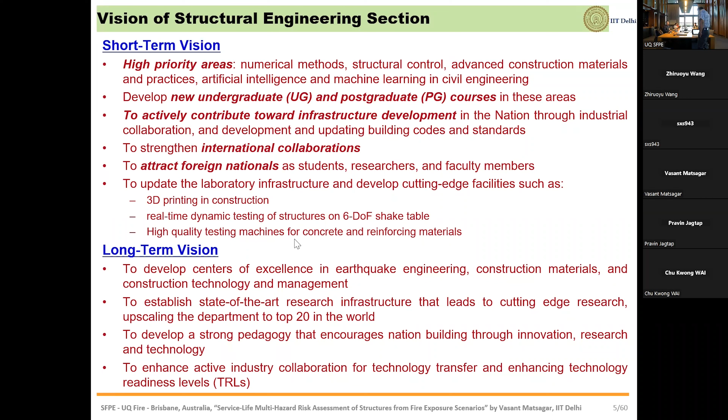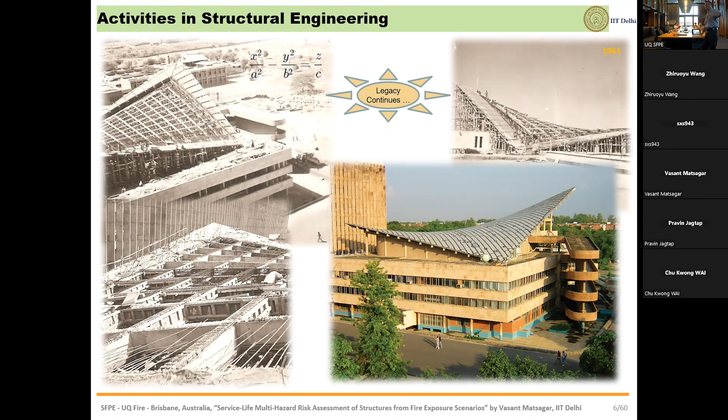Our institute was established in 1961, and structural engineers have contributed to the development of the institute. What you see here is our convocation hall where degrees are awarded every year, made of reinforced concrete, a hyperbolic paraboloid shell structure. Since then, we have been contributing to the development of the institute.

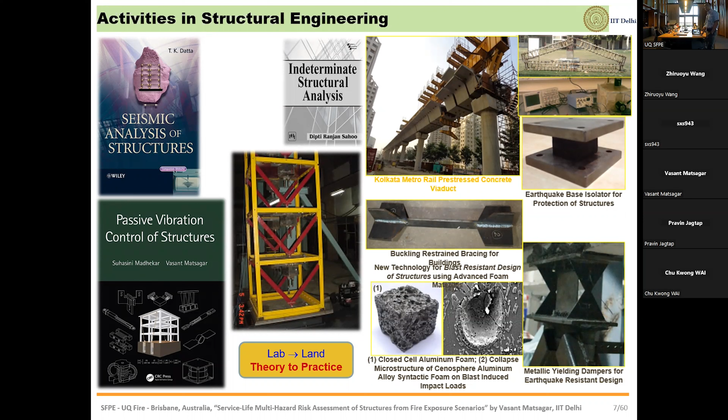Recently, there are investigations being carried out in different areas in structural engineering, with some books published as well as some patents filed. We are also transferring our knowledge from the laboratory to field practice. On this slide are some contributions we have made to national development, including flyovers, bridges, blast resistant structures, and similar contributions to infrastructure development of the country.

With that little background of the institute I am coming from, I would now move on to the topic of today's presentation, which UQ SFPE, the Society for Fire Protection Engineers student chapter, has hosted. I'm very grateful to them. Also, I'm grateful to University of Queensland faculty member Professor David Lange for hosting me during this visit to UQ. Today my talk will be on service life multi-hazard risk assessment of structures from fire exposure scenarios.

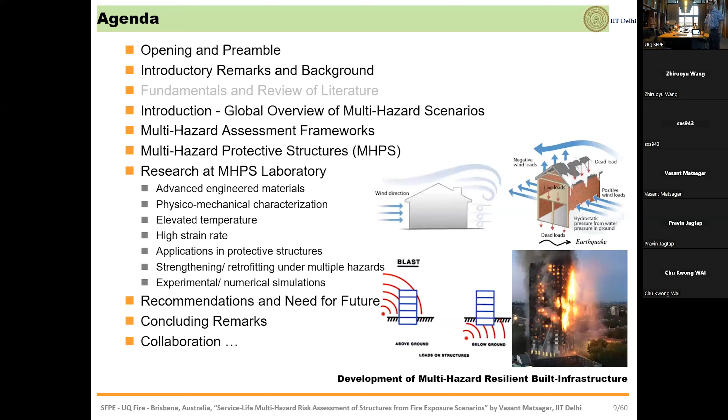The overall outline of this topic: I will talk about background details of the current infrastructure development happening across the world, and where it should be going to ensure it is sustainable and climate friendly. I will not review the literature, but will showcase the current development in multi-hazard resilience of infrastructure, laboratory facilities developed at IIT Delhi, current research works, and future works. I will present the current status of development of multi-hazard resilient built infrastructure in the Indian context in particular.

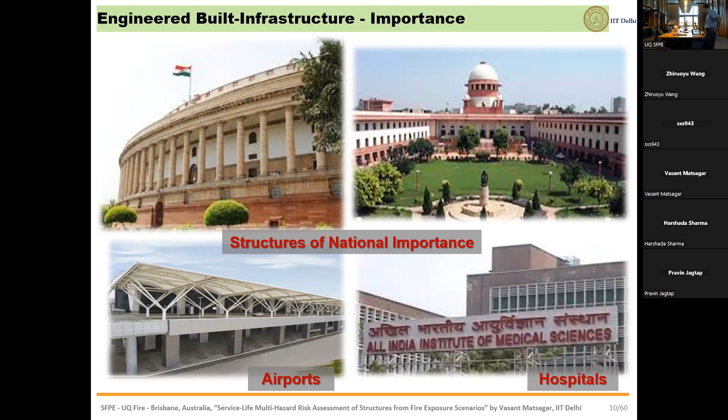Mankind requires different kinds of structures, be it nationally important structures, airports for transportation, hospital buildings for healthcare, as well as power generation, nuclear power plants and wind turbine towers. For hydroelectric power generation we need dams, and there are a large number of engineered structures or built infrastructure that we have to develop. We cannot live without them; that is one of our basic needs.

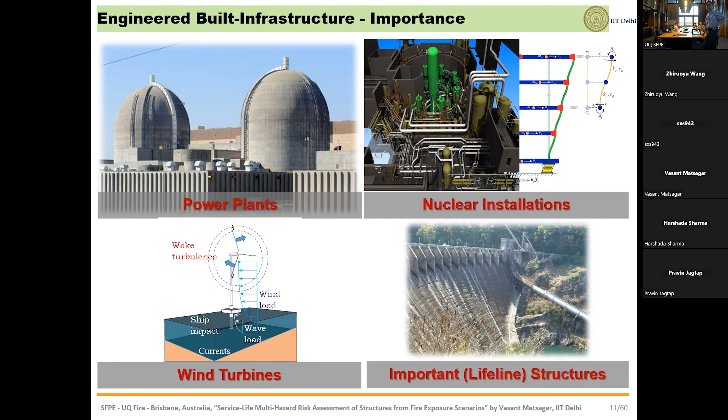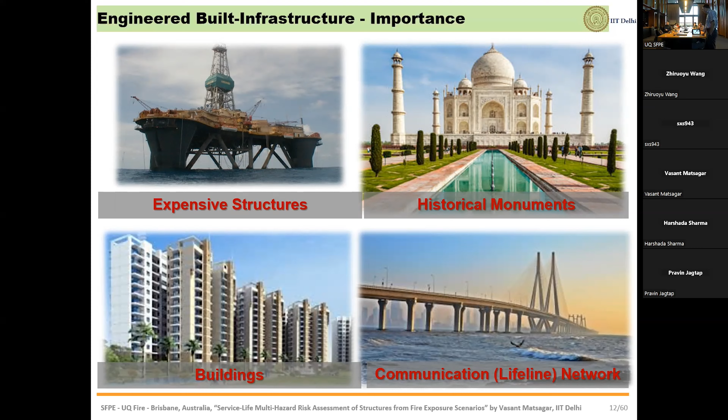If we look at what kind of structures we have been building, these are the conventional practices. We started from stone masonry structures, then brick masonry, and gradually moved towards reinforced concrete structures, and these days steel and other composite structures. Then we have to worry about how they are performing when put to use over a service life of about 100 years.

We see certain issues that most developing and developed countries are facing, in terms of both environmental impact as well as performance and aging. Old infrastructure has already aged before attaining its total design life. Typically for buildings and bridges, a design life of 100 years is considered, but much before that they have started seeing much deterioration, to the extent that some are not even in a position to be rehabilitated, retrofitted, or strengthened to remain usable. So there is no other option than demolishing them and building new ones, and that contributes significantly to carbon footprint.

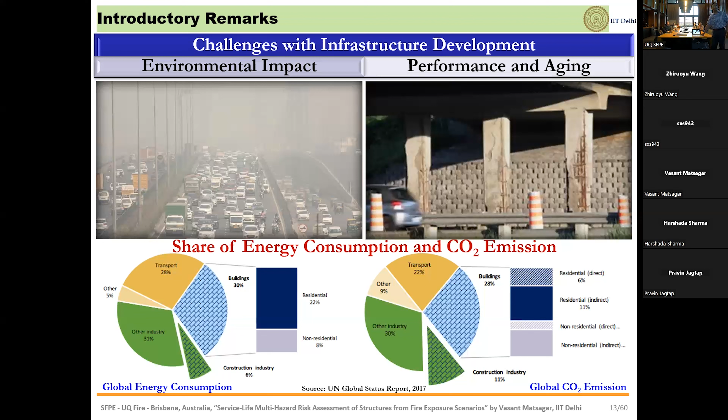There is already significant carbon footprint from the construction industry and building sector. I will keep aside the transportation sector. You can see almost 40% of carbon footprint comes from buildings and construction industry, as high as that. If you see energy consumption also, buildings and construction industry contribute significantly towards global energy consumption. This is something we really need to worry about, how we can bring this down by developing new materials and using them in infrastructure development.

If you see a global picture of building sector energy carbon intensities, it is again a worrisome picture. Focusing on these two countries, India and Australia, unfortunately there is a heavy carbon footprint in terms of terajoules, more than 150 tons, and there is a long way to go for us to develop new building materials and ensure they are durable as well as resilient to whatever loads they will experience during their service life. At the same time, we need to reduce carbon intensive materials in structural development and find alternatives which are more climate friendly and environmental friendly.

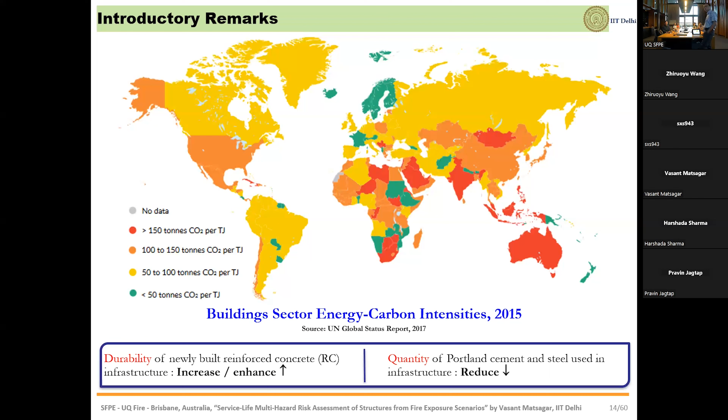Some of these issues we have started addressing at IIT Delhi. We are working towards developing new materials that are more sustainable, more nature friendly or environment friendly. There are some local issues also that we face in the national capital of India, Delhi.

Surrounding our region there are farmlands, and during the harvest, immediately after the harvesting season, for preparing the fields, the agro residues are burned - this is called stubble burning. The agro stubbles significantly contribute towards air pollution in the national capital as well as the surrounding area, going almost to hazardous levels, and we need to find a solution to that.

Incidentally at Delhi, in our laboratory, some of our students are working on converting these agro residues into useful civil construction engineering products, such as biocomposites. Currently there is one startup initiated by one of the students on converting these agro residues into biocomposites on the field itself, so that even the transportation costs are reduced.

Our overall aim is to achieve some kind of circular economy, wherein we make sure that the entire agro residue or agriculture waste is useful either in the construction industry or otherwise, while also making sure it doesn't contribute to air pollution and health issues caused because of that.

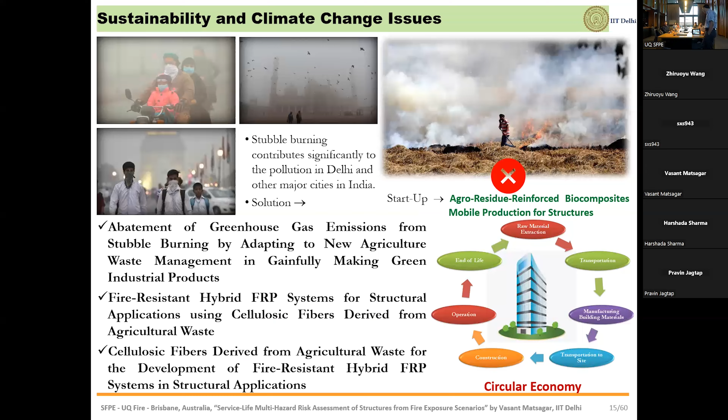With this background on how new construction materials are required to be developed and used, obviously the next question comes when we build some structure out of it, how that structure would perform, because we have good experience of reinforced concrete, we have good experience of steel, but for us, biocomposites, particularly obtained from agro residues, are an absolutely new material.

The subsequent objective was to see how it performs under exposure to fire, so there are two different categories of tests we had to conduct. But then the first question came as to what should be the loading protocol and support condition, or the load setup that we should have.

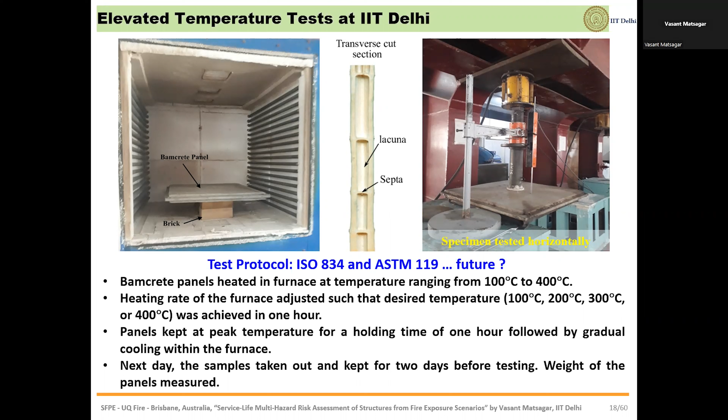Initially we applied the load sequentially, meaning it was first exposed to thermal load, then cooled down to room temperature with natural cooling, and then subjected to mechanical loading. Subsequently, we have also tested them with simultaneous application of thermal and mechanical load.

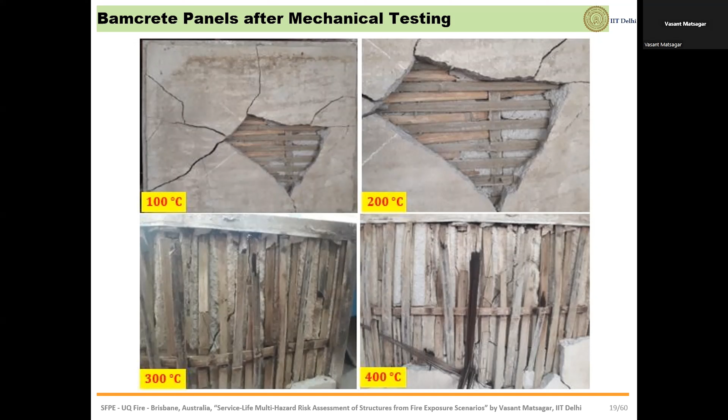As you can see, with different temperatures there is significant degradation seen, particularly in the bamboo reinforcement, and at about 400 degrees Celsius it almost loses its capacity. You can see there is falling, there is debonding between the bamboo culms and the mortar or fine concrete that we have used. With increasing temperature, there is significant reduction in the capacity of the bamcrete panel.

We have coined this word bamcrete, for bamboo plus concrete panel, and now we are applying this thermomechanical loading simultaneously. As you can see, this is about a 1 meter cube fire furnace in which we can raise the temperature up to about 1300 degrees Celsius.

Nevertheless, for this kind of natural fiber specimen, hardly up to 500 to 600 degrees Celsius is sufficient. You can see from the top, we insert a loading actuator arm, and we have the option of providing it at whatever location we would like to.

We decide when that loading has to start and what should be the time temperature curve. We are able to achieve the ISO or E119 curve in this, and then there is a stagnation period for some time so that there is uniform distribution of temperature across the specimen. You can see all the thermocouples, K-type thermocouples, attached at the top and bottom, as well as other thermocouples to measure the chamber temperature.

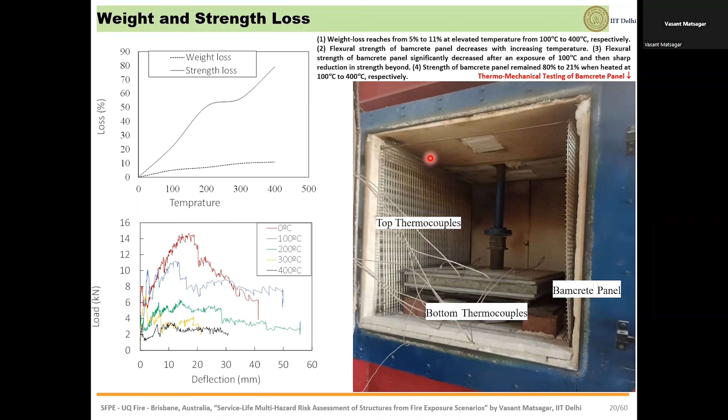Yeah, they may not be able to see. That's okay.

There are different ways that we would like to use these natural fiber reinforcements in concrete structures, either bonding them externally or internally. Internally with or without bond means, for example, post-tensioning. We have conducted some tests using post-tensioning as well, to replace the conventional steel reinforcement. This is ongoing work, and in future we would like to see them in common forms of concrete structures where they can be placed in conjunction with other fibers.

So we are going ahead with hybridization of the fibers as well as functional grading of these biocomposites used in conjunction with concrete. Of course, one would wonder that we are only looking at steel as a carbon intensive material to be replaced by natural fibers.

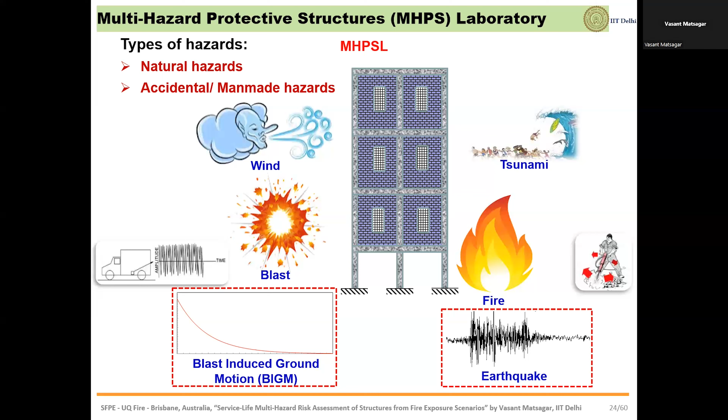It should be also looked into during the service life stage as to how the structure performs based on what kind of scenarios that the structure is going to experience. Obviously, not every structure is subjected to all these kind of loading possibilities. However, we have to see for a given structure what kind of load it would be subjected to.

There are several sources of loading. There are different hazards, and one can go on and on in looking after this. However, we have to see for a given structure which out of them are relevant and what is their time of occurrence, what their intensities are, and so on. But the bottom line here is that mere load and load combinations are definitely not adequate.

For some strategically important structures, blast is important, whereas for some other structures located in earthquake prone area, earthquake becomes a major hazard. Likewise, the use of the structure also governs as to how its response or how its performance should be. For example, for healthcare, the vulnerability of health sector infrastructure should be much less as compared to some unimportant storage kind of structures.

So vulnerability assessment of structures depending on its use, depending on the exposure condition, depending on what kind of intensity it will be exposed to, we need to evaluate the vulnerability, and eventually we go to quantifying the risk associated with it, not only at the design and construction stage, but also during the service life of the structure. And this is one area where almost no work has been done, unfortunately.

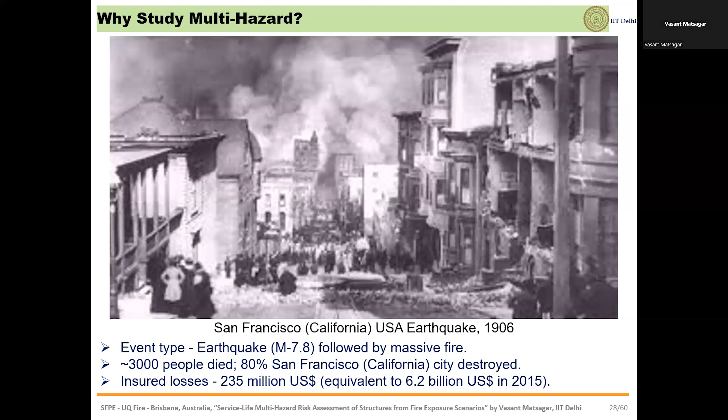So it was one of the very unfortunate incidents that happened because of the cascading event of an earthquake followed by a fire event. More than 3,000 people died, and almost 80% of San Francisco city was destroyed at that time. And in today's terms, it is $6.2 billion of economic losses. So this is a very peculiar example of multiple hazards, but there are several others.

Though it happened in 1906, subsequently in 1994, about 90 years after that, we have probably not learned the lesson. Again, in the Northridge earthquake in 1994, some of the structures caught fire, and again there was significant economic damage, though the casualties were not as high. It was about 87 people who lost their lives during these unfortunate incidents.

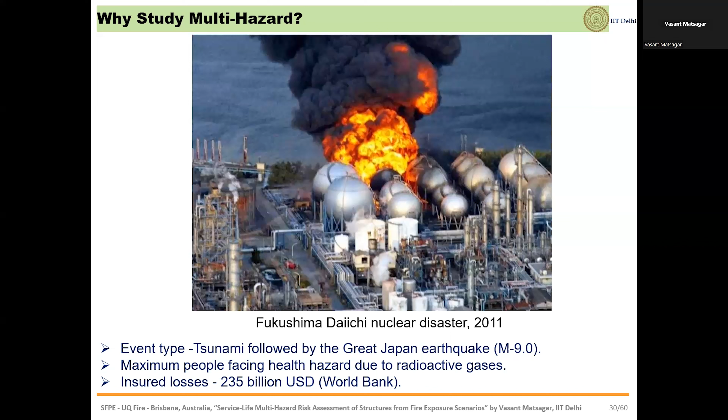But of late, probably most of us have experienced the unfortunate incident of the Fukushima Daiichi nuclear disaster in 2011. Again, this is a very peculiar example of multiple hazards. There was first a tsunami. Obviously, we understand that a tsunami is triggered by an earthquake. In this case, it was the Great Japan earthquake of magnitude 9. And it led to, unfortunately, the nuclear hazard, and that eventually gave rise to the health hazard. And in this case also, though the death toll was not as high, the insured losses were estimated at $235 billion US dollars.

So with this background, at IIT Delhi, in our multi-hazard protective structures lab, we have been working on multi-hazard resilient infrastructure. Out of all these different possible hazards, we have taken those which are most common, two from the natural hazards: earthquake ground motions and wind loading on the structure. And from the accidental hazards, we have taken two: accidental blast-induced forces, either in terms of ground motion or in terms of pressures, and fire loading, either accidental or otherwise. So we have these four hazards that we have started working on, to see how the structures perform under the action of these different events.

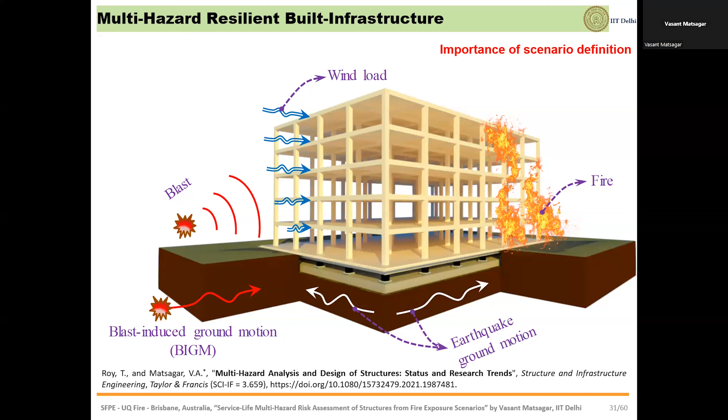But as I said in the beginning, we need to define the scenarios, and for a given structure, what kind of scenario of this loading would happen, we look into that, and then we analyze it. So that scenario definition becomes quite important.

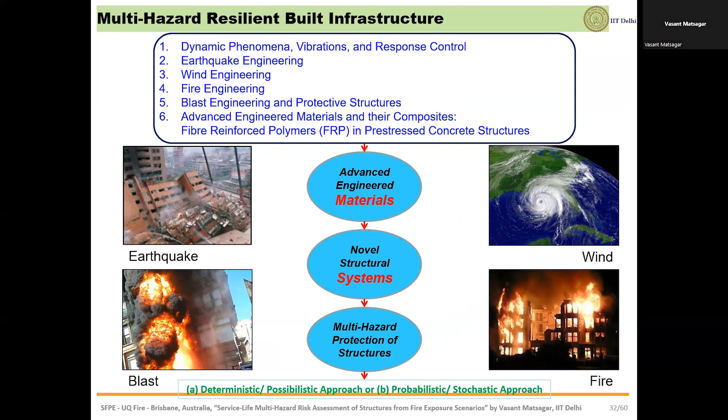And then there are different construction materials that we use, the conventional ones such as masonry, the contemporary steel and concrete and their composites, and advanced engineered materials such as fiber reinforced polymers. All of them need to be evaluated at both structure level and system level to quantify their performance, and to see whether we are able to achieve the desired performance or not, on both the deterministic scale and the probabilistic scale, under the different kinds of loading they are going to experience. And unfortunately, there is an interaction between these events, and I will quickly talk about that interaction in the subsequent slide.

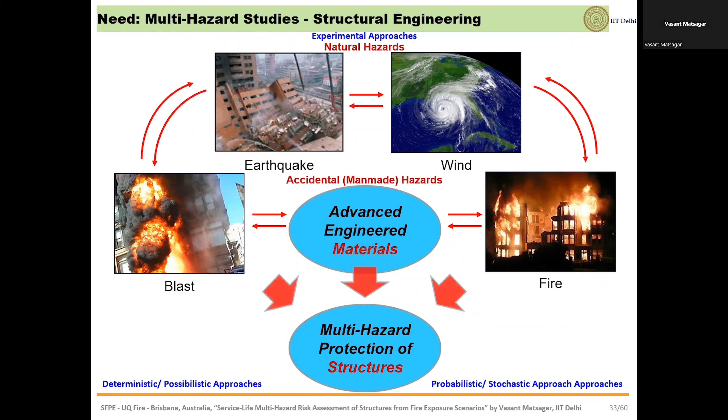So eventually, we work at two levels: material level and structure level. At material level, in order to quantify their physical and mechanical characteristics, and at structure level to see their structural performance in different terms.

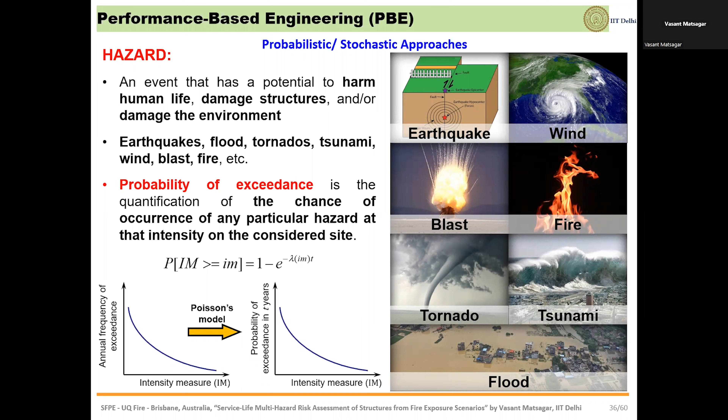However, for earthquake, for wind, and for blast loading, we need to come up with some kind of test facilities as such. If we talk about the probability-based approaches, the foremost requirement in this case is what is the hazard definition. We need to define the hazard, then its intensity, and when we try to quantify its vulnerability, we need to understand what are the important intensity measures we have to choose in order to finally reach towards the fragility analysis, which will again give us an idea about the different performance level, and then give us an idea about what kind of risks are associated and whether we are okay with it or not. So we use these terms when we go towards the performance-based analysis.

Conventionally, we used to only worry about the static loads, but now we are also more worried about the dynamic load, particularly because the structures are becoming more and more flexible. Structures are becoming more and more taller, and because of that, on one hand side, we have change in the stiffness of the structure, which also means there is change in the frequency content of this structure and its response. And on the other hand side, we have started using newer and newer types of engineered materials.

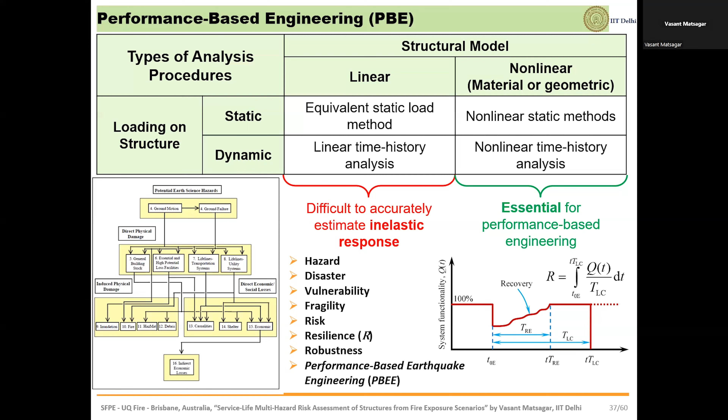So this is from the structural viewpoint, but from user viewpoint also there are significant changes happening. Users are more now worried about the serviceability, and therefore performance requirements from user side also have increased, and therefore the conventional design approaches may not necessarily suffice analysis and design of structure. Therefore, whatever risks that we are calculating, we need to be very cautious about whether those quantification of the risks are appropriate for a given scenario or not.

For example, at some time there was an earthquake, and after a few years, a few months, there is another event, either in terms of windstorm or flood. So we calculate the response of the structure as to how it performed during that earthquake, and because of the damage caused because of that earthquake, how it is now performing against, say, for example, wind hazards. But these two hazards, they are completely independent of one another.

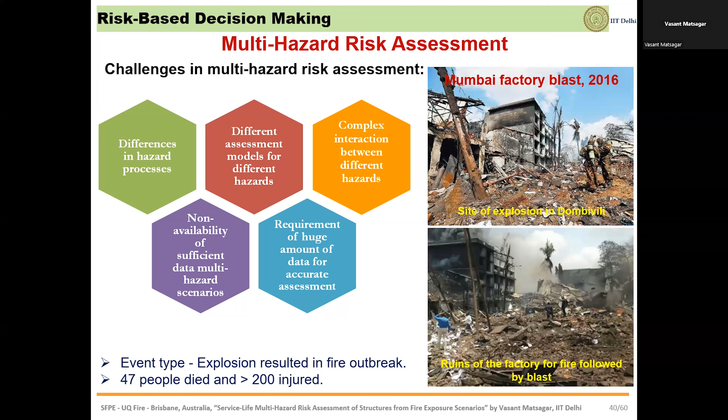In this particular fire-following-blast event, 47 people died and more than 200 were injured. For our industrial infrastructure, we need to design structures which might be subjected to a fire following a blast event.

I think I can take 10-15 minutes. Yeah.

Conventionally, when we talk about one hazard, calculating or evaluating the vulnerability is relatively straightforward. You have only one intensity, and you see what is the probability of failure against that one intensity of loading level. But for multi-hazard, the response surfaces—for example, in a two-hazard case, you have intensity measures of two different hazards, and then find out the fragility surfaces that can be estimated from the response surfaces.

Now, if it is more than two hazards, we have to plot them on different scales and see how they are interacting with each other and find out how vulnerable they are. Then whatever technological interventions you are doing—in terms of control, or some material resilient against given hazards—we see how we are lowering the probability of failure on these different scales or intensity measures.

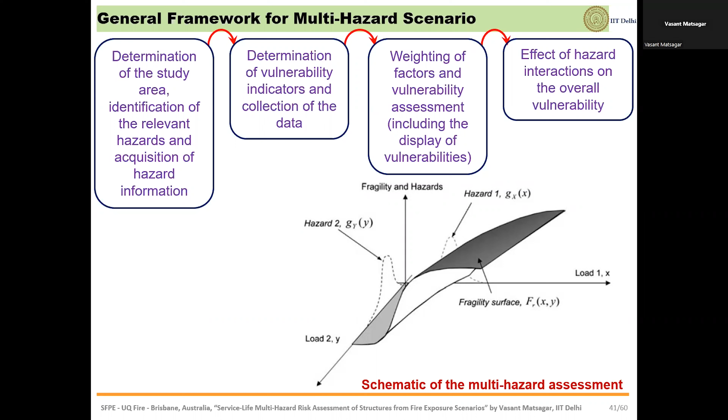In order to do that, because it is on a stochastic, probability scale, you need a significant amount of data. We need to also define the limit states of failure, and then decide what is the intensity that plays a significant role in quantifying the vulnerability of the structure.

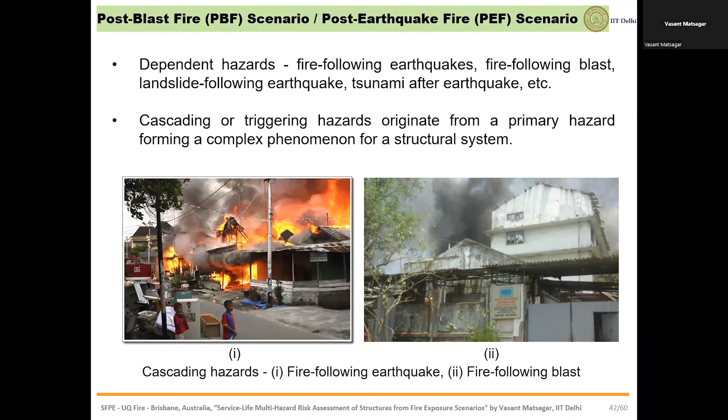I have taken only two examples for today's talk because it is related mainly to fire exposure scenarios, and there are two fire exposure scenarios that I will quickly talk about: one is the post-blast fire scenario, and the second is post-earthquake fires. First is the fire exposure after the blast—the post-blast fire scenario.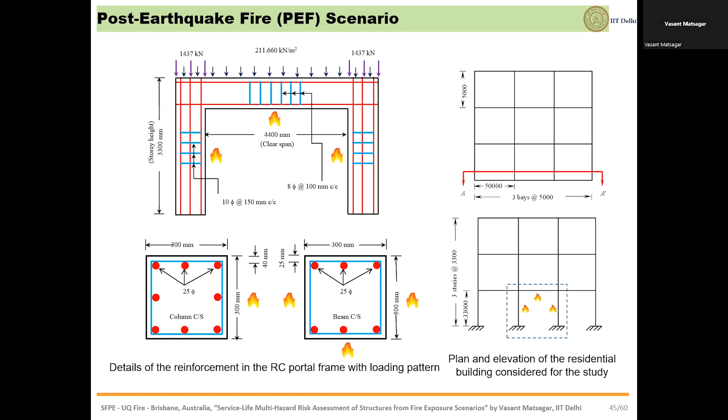So both on the material side and the loading side, as well as on the structural side, we are trying to go towards as accurate modeling as possible. And that is happening at both the deterministic scale and the probabilistic scale.

Here on top is a reinforced concrete portal frame. When it is subjected to only earthquakes, what kind of damage has occurred? When it is subjected to earthquake followed by fire, what kind of damage has occurred in those reinforced concrete members? Depending on the intensity of the earthquake that has hit the portal frame, how much damage has occurred, and subsequently what has happened to the fire behavior or fire response of the structure.

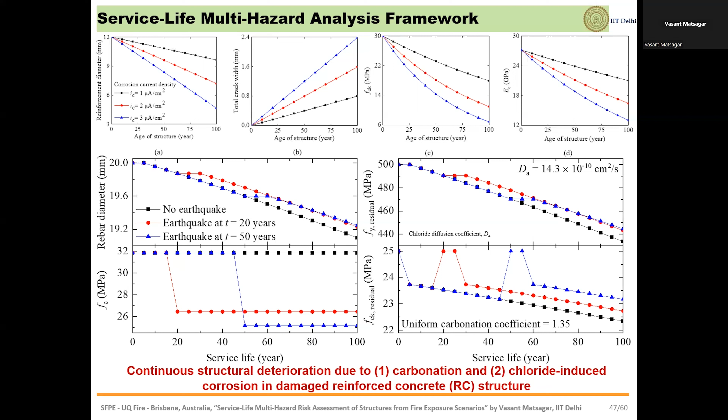He has considered 100 years of service life, and examined what happens to the grade of concrete, the modulus of concrete, which has direct effect on serviceability in terms of deflection and vibration, and what happens to the reinforcement and how it degrades. If we introduce certain strengthening measures, what level we can reach up to, and what will be the factor of safety.

So this is ongoing work in collaboration with UQ to see the effects of different agents that work on the structure and how they degrade material properties, and whether or not we are satisfied with the factor of safety that is left. He has developed this assessment framework for these kinds of structures, with different boxes as you can see.

First is the hazard definition, which is one of the most important, as it also defines the scenario. What are the different kinds of hazards that need to be taken into account, and what are their timelines.

The next one is the structural analysis. Again, we typically prefer to use high fidelity 3D finite element models, depending on time constraints or computational requirements. In this case, we had to come down to a framed model rather than 3D, but for other cases we have used the 3D finite element, and then look at how it affects decision making for the structure, incorporating strengthening measures.

As you can see, the red color indicates this, and we carry this out for a total of 100 years of the structure's life, looking at what happens when certain earthquake events take place, and its fire response over the period if there is some eruption of fire.

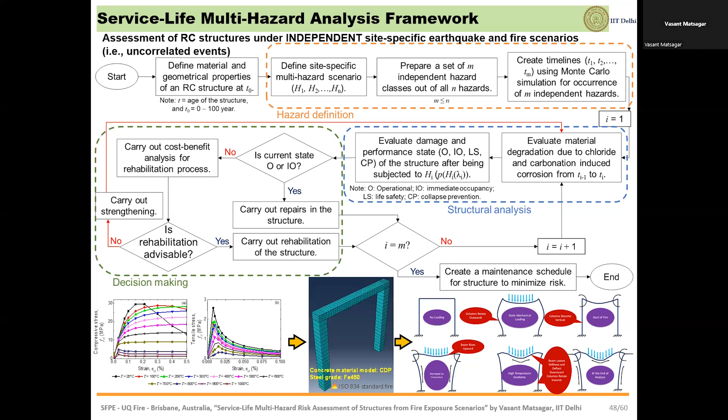For example, in case of a portal frame subjected to fire, we have seen that its behavior is significantly different even with just a small change in boundary conditions, because of the change in exposure condition and what kind of loading it has. There is significantly different system or structural level response in this portal frame, which otherwise is not so intuitive.

This work is further being carried out with non-simultaneous or non-cascading occurrence of earthquake and fire, again on the probabilistic scale. One of the challenges here is how to define even the intensity measure, and which intensity measure is to be taken.

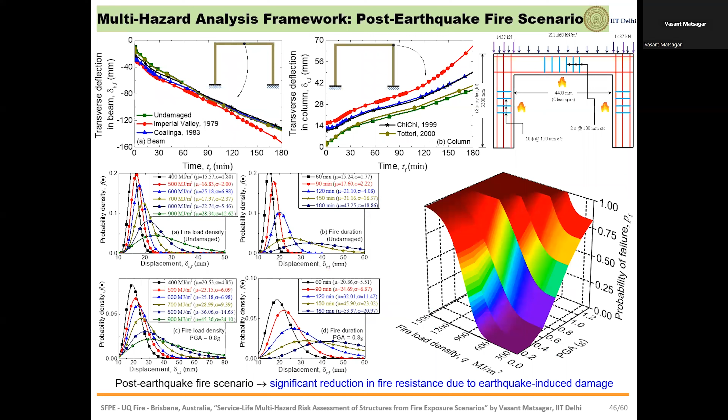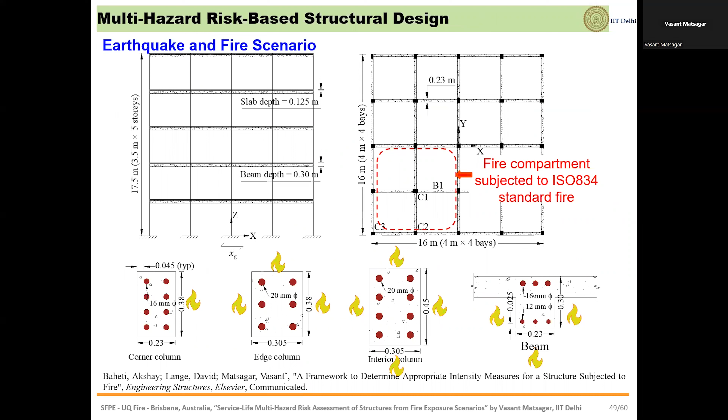Earlier we had simply taken the fire load density on the x-axis, but here we are first working on which kind of intensity measure is more suitable for development of this kind of analysis framework.

As I have said, definitions of the multiple hazards is important, then scenario-specific and site-specific hazard definitions are required, along with probabilistic models. What happens to the material properties during the service life is important. Once you take that into account, whatever analysis models I have shown you are incorporated, and they give back the performance of the structure.

If that performance of the structure is acceptable, if that factor of safety is acceptable, we complete the design, but otherwise we go back and go through that iteration of carrying out the design optimization.

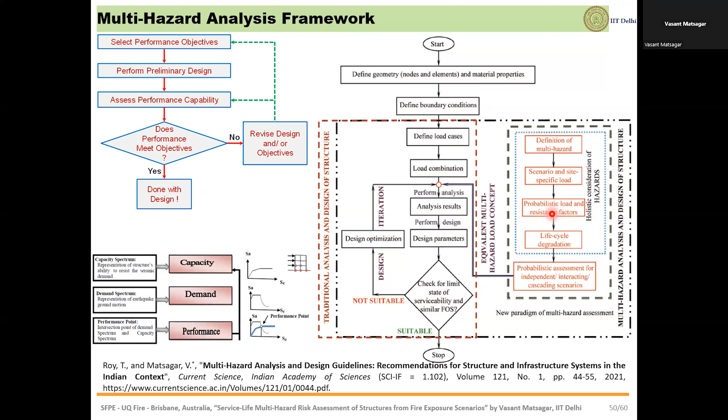But here again, when we talk about whether it is satisfactory or not, we would like to do that on a performance-based scale, and that performance scale is not fully developed except in earthquake engineering. So that gives us a new challenge as to how to evaluate performance-based evaluation of the structure when it is subjected to multiple hazards.

So we have introduced this new multi-hazard assessment, and now the current work is how to first take it towards vulnerability assessment, and then eventually translate it into performance-based structural design, taking into account the service life performance. So hazard definition, then the service life, the duration the structure would be serving, how the material properties are degrading, and how they will change the response of the structure.

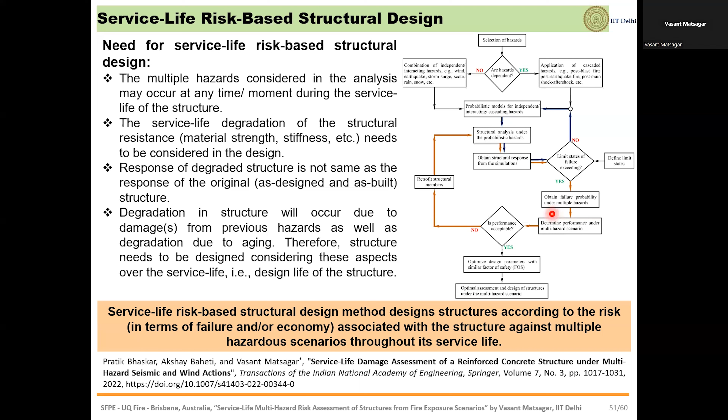All this requires a huge amount of data. Essentially, we are currently focusing on service life risk-based structural design method, designs of structures according to the risk in terms of failure and/or economy associated with the structure against multiple hazardous scenarios throughout the service life of the structure. So these are the ongoing investigations.

If you put it in perspective as to where we in structural engineering have started from: long time back we were working just on the working stress method, but subsequently the ultimate load method was introduced for a very short duration, and it was replaced by the limit state method, and now across the world we are following limit state.

But later on, performance-based engineering has seen its day, and for the last about 2 to 3 decades we have been working on performance-based engineering and risk-based structural design. But now, looking to the future, we will probably go towards multi-hazard risk-based structural design and service life risk-based structural design.

Particularly in today's discussion, what is important is that even for performance-based engineering, we need to have those kinds of frameworks or analysis approaches developed for performance-based engineering, which are yet to be fully developed as compared to what exists for earthquake engineering.

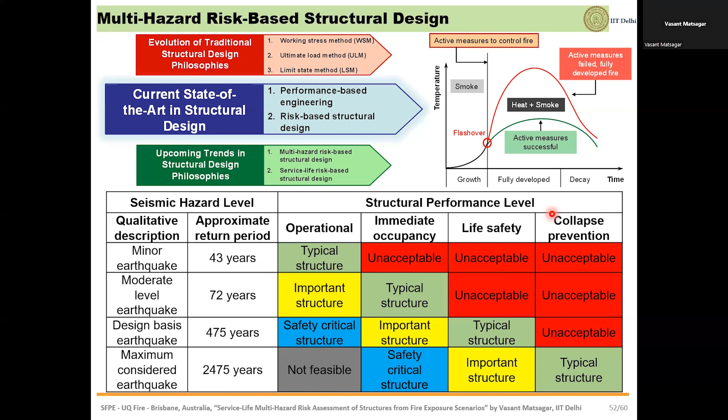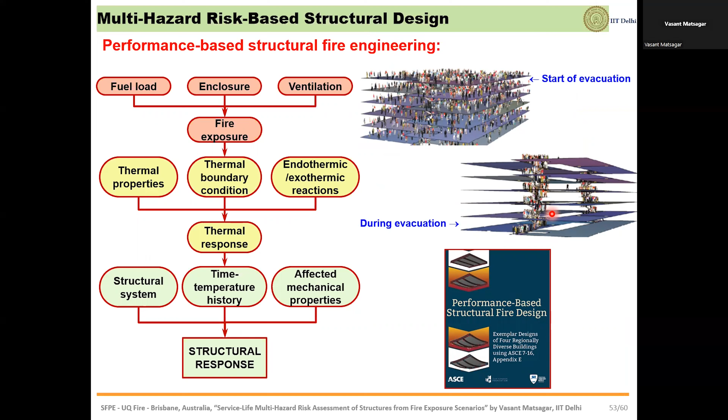Particularly from the performance-based structural fire engineering, I foresee there are significant opportunities for collaboration because much work is required to be done in performance-based structural fire engineering in terms of modeling, developing material properties, constitutive relations, and how they interact with each other during response evaluation. All that is currently an ongoing activity.

So these are some of the takeaways from my presentation today. The code-based structural design methodologies are still prescriptive in nature, and thus they provide lesser importance to the specific scenarios I have talked about. Performance-based engineering does take into account the inelastic behavior of the structure for site-specific conditions.

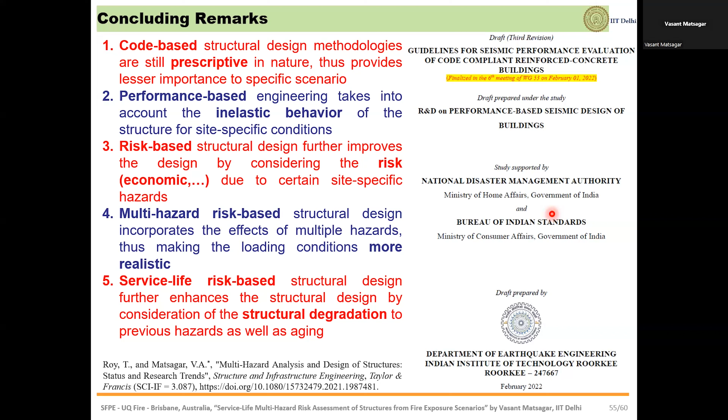In future, risk-based structural design will be introduced, and it will take into account risk in different forms, either economic risk or risk of loss of life due to certain scenario-based and site-specific hazards. A more realistic assessment of structures based on multiple hazards will be taken into account in future building codes. Already some work is ongoing where I happen to be one of the committee members working on multi-hazard analysis and design of structures. Down the line, building codes and national codes will probably change from the currently design-stage-based and construction-based approaches to service-life-based approaches for the design of the structure.

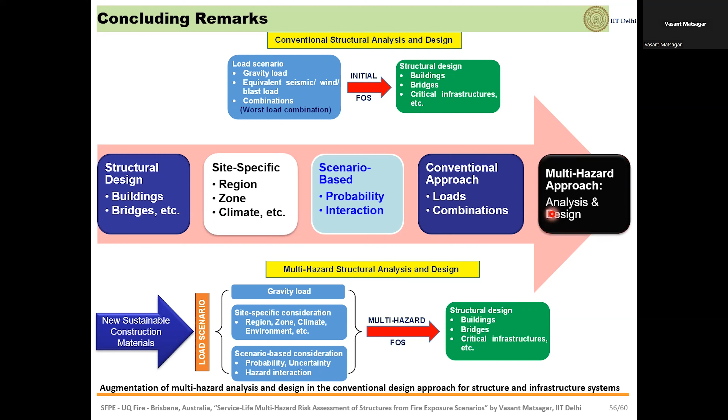I summarize this pictorially also. Our conventional structural analysis and design is based on just an initial factor of safety. However, if we incorporate multiple hazards and what happens to certain properties during the service life of the structure, and consider the different possible scenarios, then we change that conventional analysis and design strategy into multi-hazard structural analysis and design, where we take into account site-specific and scenario-based considerations to ensure we have an acceptable factor of safety for a given structure under given conditions throughout its service life.

So with that, I conclude this presentation, but I would like to thank the invitation I received from Professor Lal as well as from the student community here for delivering this presentation, and I'll be glad if there are any questions, comments, or points of discussion on whatever I have presented. Thank you so much for your attention.

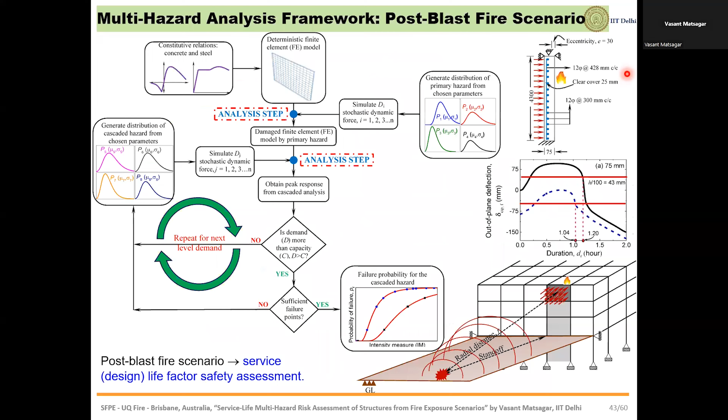Because I thought the way you apply bamboo fiber to concrete is kind of similar to the way you apply carbon fiber to concrete as well. I thought you did lots of tests—so how about the structural performance compared with carbon fiber and concrete?

But when we expose the carbon fiber reinforced polymer panel to this temperature, typically it does not show this kind of spalling at this temperature level. And obviously, in terms of material properties, the epoxy oxidizes much earlier, but the fiber remains for some more time.

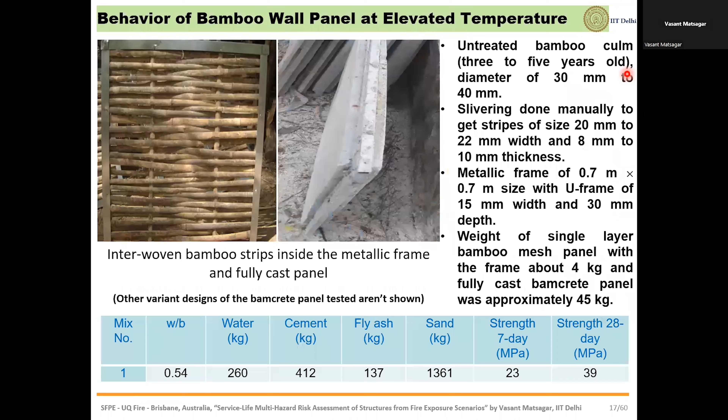But if you talk about individual bamboo and individual carbon fiber, that comparison one can make. Individual bamboo fiber we are currently testing—those tests are not complete—but individual carbon or basalt fibers we have tested already, and in one of the slides I showed that.

One of the challenges is how to hold the bamboo in the grips, because when we try to load it in tension, there is slippage at the end. And we cannot just tighten it because there will be localized failure at the grip level in the bamboo culms. And then even the sizing of the bamboo, what kind of specimen we should have, what kind of gauge length we should have, there are hardly any guidelines available. So that part is currently in process.

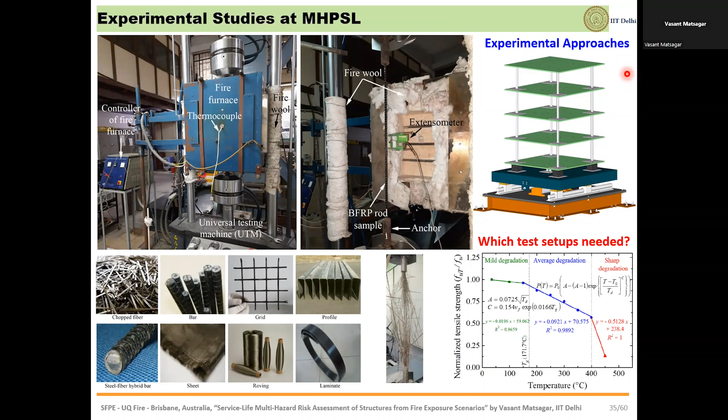So that one-on-one comparison between CFRP, GFRP or BFRP rods with respect to bamboo is not available right now with me. But from structural considerations, yes, we do have some leads on that part in terms of those panels which I have shown. Was that your question?

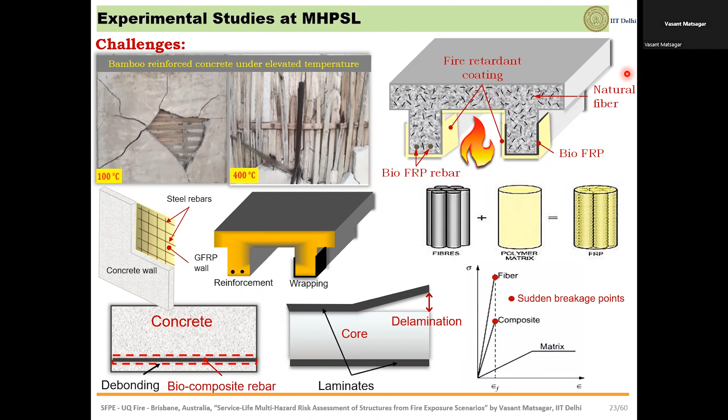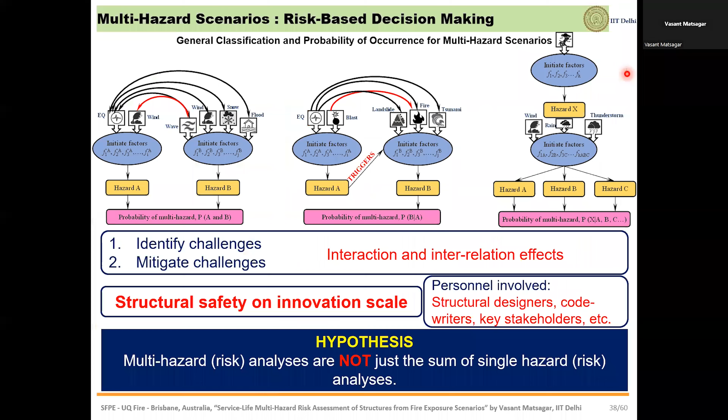I actually have one last question. So some different structural designs have better resilience performance than others, when against, let's say, an earthquake or something else, and fire safety engineering. Did you find something? Yes, we did. So during the talk, because again time is limited, I did not present those results here.

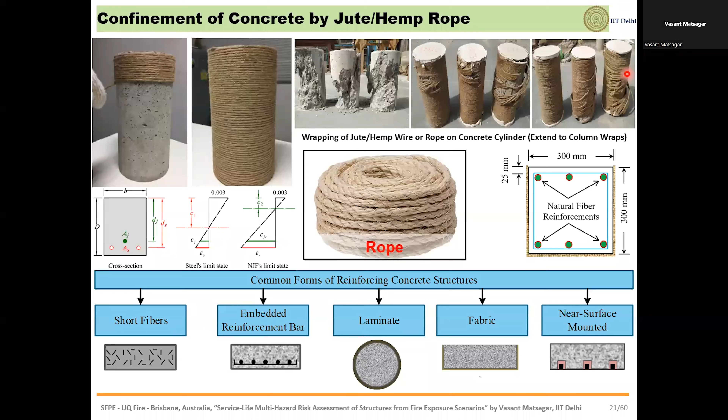But in some of our tests, we have tried to achieve the ductility through structural means rather than through the material. Whenever we talk about ductility, inelastic deformation, we talk about the nonlinear stress-strain curve of material behavior. But when we talk about these synthetic fibers, or even these organic fibers, the material behavior is just brittle. We don't have any nonlinearity. But we are not restricted to rely only on ductility achieved through the material route. Rather, we try to achieve ductility through the structural or system route.

So we have put the brittle reinforcement here. Concrete is brittle, reinforcement is brittle, but we have adopted different ways of providing that reinforcement in the concrete structure. What are those different ways? One is layering of the reinforcement. So there is some reinforcement which is closer to the neutral axis, such that those layers which are extreme from the neutral axis are stretched to their limit and fail in a brittle manner. Nonetheless, there are other layers yet to fail, but your load deformation plot has already shown a different stiffness. It has degraded. So you get a pseudo ductility. So that is one way.

Second way is we have pre-stressed them, and the level of pre-stressing was different, and some of the rebars were not pre-stressed. So they had some reserve capacity. So when some tendons fail, there is a reduction in the stiffness, and that happens in a progressive manner. So stiffness reduces gradually. If you see the overall stress-strain diagram, it has significant non-linearity, even when all the material used is brittle. Likewise, we have also changed the grade of concrete and so on. So we could achieve that ductility not from the material route, but from the structure or system route.